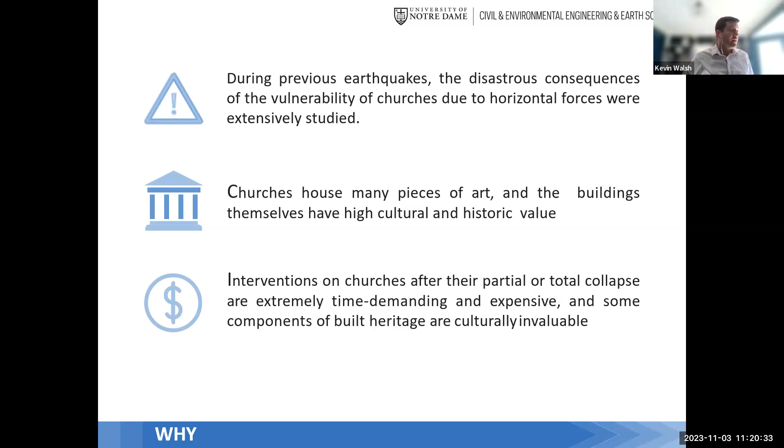Well, there are a whole lot of churches in Italy. We joke that if you spun yourself around three times blindfolded and just stumbled a couple hundred meters, you probably walk into a Catholic church in towns in Italy. So there's a whole lot of churches, and you can't simply say, well, let's go retrofit all of them right now. Which ones do you start with? How do you retrofit them? There's a lot of decisions that have to be made before you just go about doing that, because certain types of seismic retrofit can be very time demanding, expensive, and of course, hurt the fabric of the church itself.

So here's a number of facades as well. You can see that there's quite a bit of variety, even though we're going to talk about how we tried to make our sample population as homogeneous as possible.

So we selected 72 churches across Italy. To the extent of our knowledge, this is the most geographically extensive review of medieval churches in Italy. There have been very good and detailed and precise evaluations of churches in specific regions, typically following earthquakes, but we're not aware of one that went as far north and as far south as Italy. Italy is a very parochial country, and one of my colleagues joked that the only reason I could work in both the north and south was because I wasn't Italian.

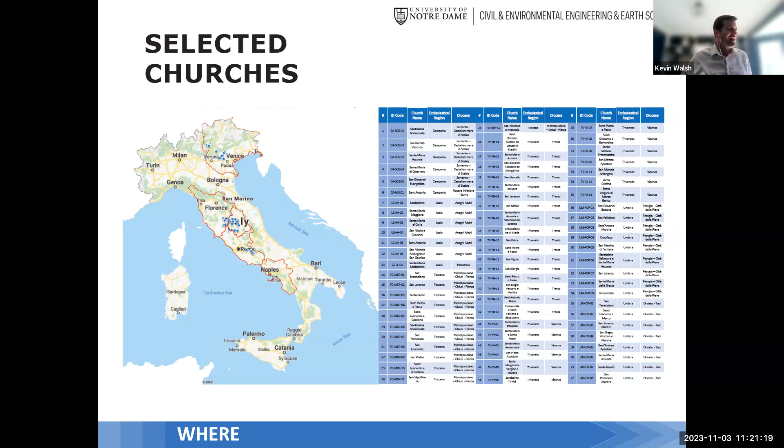So how do we go about selecting churches? There are thousands, tens of thousands of churches in Italy. How do we select the 72 that we ended up working on? Well, there were 4 criteria, and I won't name them off here because we're going to go through it.

So first is architectural and spiritual value. There needs to be some people going into the church, though not necessarily a lot. I want to emphasize we weren't necessarily looking at large churches, like St. Peter's, where much smarter and better resourced people have already put a lot of effort. We're largely focusing on smaller, rural, community churches, ones that maybe have been overlooked by researchers and investors in the past, but we still want to make sure they are being utilized, particularly by members of the community.

Geographic region, we wanted a spread, for a few reasons. We wanted to look at churches with differences in their material makeup, which look quite different in the north versus the south. We also wanted a range of seismicity. While all of Italy is, by US standards, medium to high seismic, there is still a spectrum across the country, and we wanted that diversity as one of the components for our holistic risk assessment.

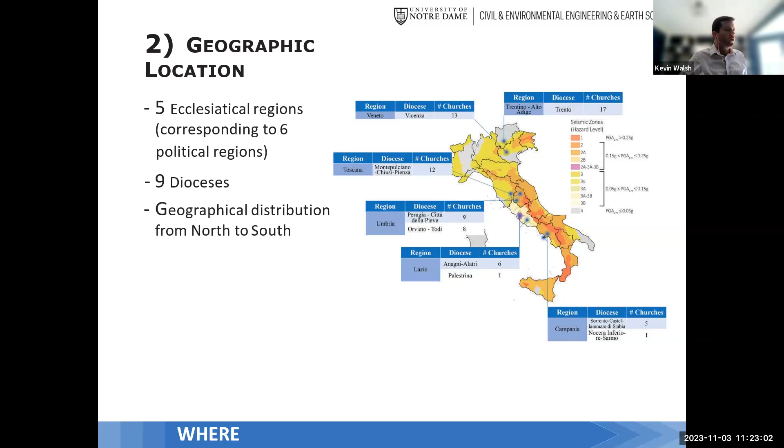Overall, our churches covered 5 ecclesiastical regions, corresponding to 6 political regions and 9 dioceses. We went all the way up in the north in the mountains, down to Naples in the south.

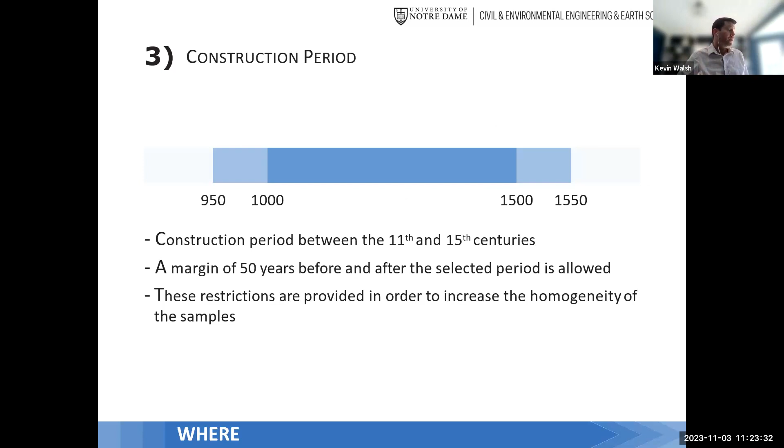Construction period was medieval, largely between the 11th and 15th centuries. We gave ourselves a 50-year buffer on either side, again trying to increase homogeneity. Lots of churches were built after that time period, and even some before it, but we wanted to focus on this era as a popular church-building era for many of these community churches, representing an extremely important heritage value to the people of Italy.

For those who haven't been to Italy, the layout of many old towns—and when I say old, I mean 1,000 years old, not 80 to 100 like in America—is quite different from what we see in North America. A lot of these churches are not separate buildings from everything around them. One of my colleagues took me to his mother's hometown, and it was literally just one building, with tunnels and doorways carved through it, where a whole town of a few hundred people lived in one contiguous structure. That requires a very different structural engineering approach to analyze.

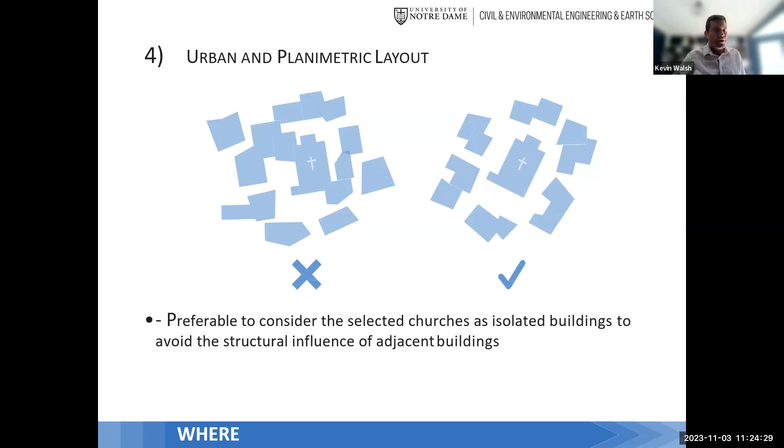So we helped ourselves by looking only at planimetrically isolated churches. The church needs to be standing by itself, not necessarily connected to a large number of other buildings in the community. That way we can carry out the structural vulnerability analysis more readily.

We actually did 3 phases of this work, and I'm going to focus on 2 of them today. First, how do we come up with a provisional seismic risk assessment? The goal is to tell the facility managers of an archdiocese how to prioritize which churches to investigate further—which costs more money, hiring a competent engineer, and potentially retrofitting—so they know where they're most likely to get their proverbial bang for the buck.

If you've read this excellent document from the World Bank, it defines 4 components of risk: hazard, vulnerability, exposure, and consequences. There are different definitions—some people combine 2 of the last 3—but generally speaking, risk is the functional product of these 4 components. We wanted to identify factors related to the churches that would represent these 4 components, and we came up with 13.

Hazard, for example, would include seismicity, where we looked at a number of different average return periods. Vulnerability would involve the material and structural strength, or lack thereof, in different components of the building. Consequences would involve economics and what is lost if the church is damaged, and exposure covers who's using the church, how many people are in it—basically how much life is at stake if the church were to collapse with a congregation inside. So we have 13 different subcomponents that we looked at over the course of the study.

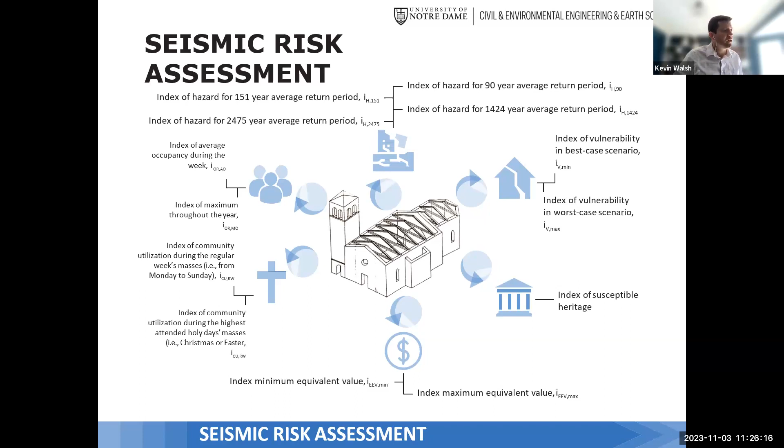I'll start with our index of hazard. Here we looked at the peak ground acceleration, just following the Italian standard for this.

Now, I just told you in the previous slide that we need to combine 13 different disparate pieces of information. They don't follow the same scale, so how do you do that? For every index I'm going to talk about, you have to come up with a statistical distribution so you can renormalize the values, whatever the unit is, into an index between 0 and 1.

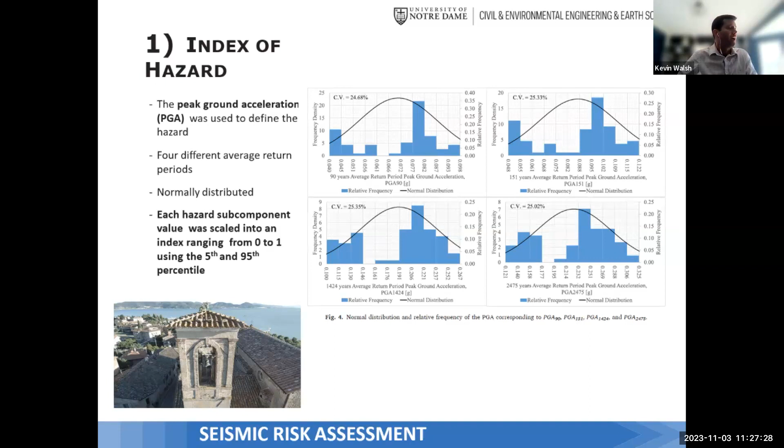We generally use distribution cutoffs of the 5th percentile and 95th percentile in order to do that. I'm not going to repeat this step on every slide because it would become redundant, but we use this approach on all of the indices I'm about to cover here.

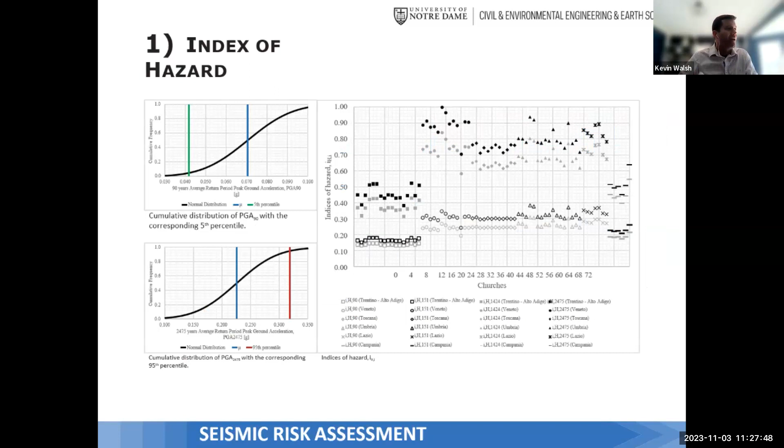For each of our 4 major components of risk, we came up with an index. First is hazard, and you can see that when you take the seismicity of our 4 different return periods across all the churches in our different regions, you get a pretty good spread between about 0.1 and 1 on a normalized unitless index. So the next major component of risk is vulnerability.

We wanted to look at the lack of structural strength in a building. If you think about major earthquake collapses you've seen from videos of Northridge or the 1985 earthquake in Mexico City, you see buildings that get very damaged and then tend to collapse into their footprint. That's your standard moment resisting frame building in a downtown area, say in North America.

But if you're looking at an unreinforced masonry building, particularly one with very tall and slender elements like a church, that's not always how the buildings fail or collapse. They tend to have large components that just fall outward, for example.

So what the Italians have done is identify these as macro blocks. If you look at a church, you basically pretend it's made up of a bunch of loosely fit together pieces, which is largely what it is, big pieces of walls. And how do those elements actually collapse, fracture, crack, or fail in some meaningful way?

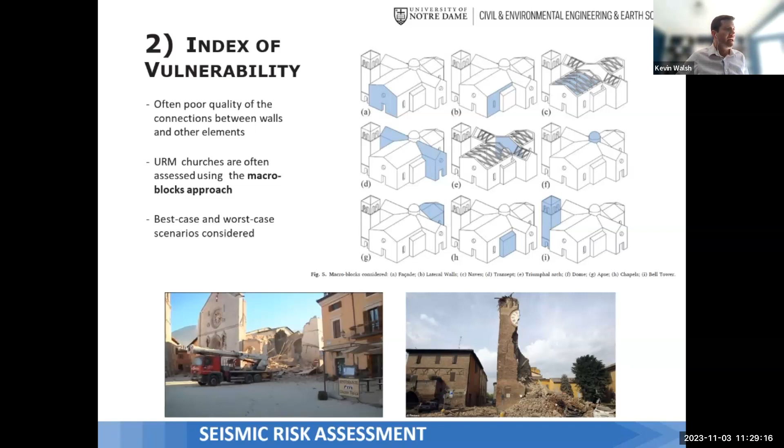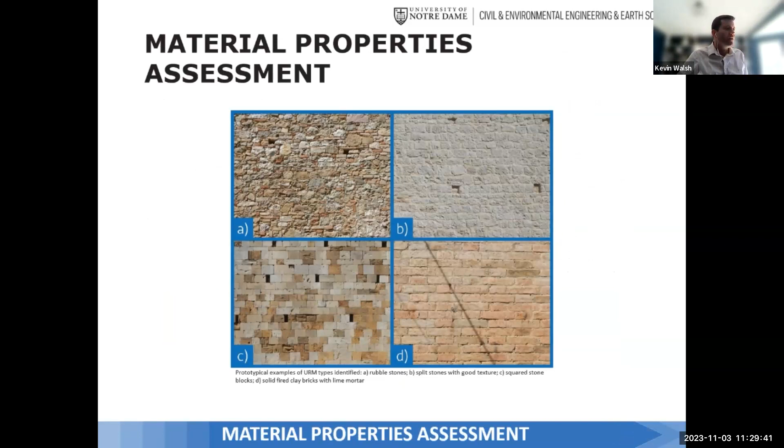I mentioned before that there's a wide range of materials depending on where you are in the country. I'm not going to get too much into our material assessment, there's a whole other paper and presentation on that. But I wanted to give you a sense that we have everything from nicely put together field rubble to almost manufactured-level consistency of rectangular bricks and blocks. So a wide range there.

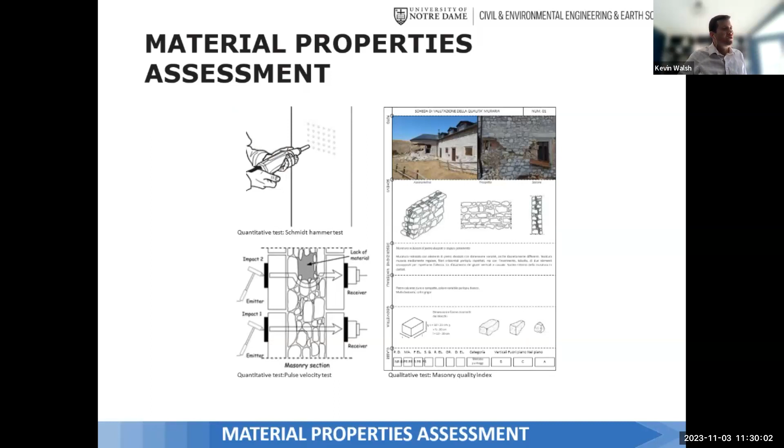And we carried out non-destructive testing. Why did we do this? Well, some of the macro blocks can only be solved if you have a sense of the material properties. We used a Schmidt hammer and a pulse velocity test. Obviously, the owners of these churches didn't want us taking out large chunks of their building and doing destructive lab testing, as informative as that might have been.

And we had a group of undergraduates who helped us. We're a very teaching-focused university at the University of Notre Dame, and we love getting our undergraduate students into the field, particularly if they can go abroad. So David led a troop of undergraduate students in civil engineering to Italy to help carry out these seismic risk assessments, and you can see them lining up the grid and carrying out the non-destructive material testing.

So our next index is exposure. Basically, who uses the church? We looked at a number of different flavors of this, like on average, how many people are in the church. A lot of Catholics nowadays tend to be Christmas and Easter Catholics, so you get very large congregations on major holidays, but not necessarily every single Sunday. So you want to look at both the average and the maximum occupancy here.

The other component we wanted to examine was community utilization. Let's say you have a small community but they actually have multiple churches. People tend to be very devoted to going to one church over another, and that's perfectly fine. But if your concern is, well, if one church collapses but we still have another twice as big as it needs to be for the population, people at least still have a church they can go to on Sundays and holidays, so there's still a church serving its function in the local community. We wanted to look at the community utilization of churches by considering the number of churches and the population of the community.

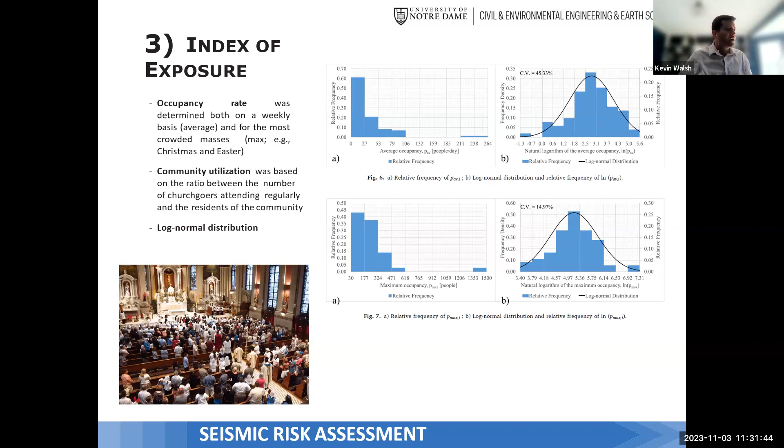You can see that we came up with some log normal distributions there, which are not uncommon at all when you do anything in a sociological sector.

And then finally is the index of consequences. This is where I get really nervous. I'm a structural engineer by trade, I'm a very good structural engineer, but I am not an art historian.

But if you appreciate and value the susceptible heritage inside these churches, you need to account for it in some fashion. So following educated judgment, as well as archives of the diocese and touring guides of Italy - there's a famous guide called the Guida Rossa, I'm pretty sure I butchered that, David's probably giggling at my attempt at speaking Italian - we had a sense of where important art was in churches.

And of course we also visited the churches ourselves. There was one small rural church that had an original Michelangelo statue. Incredible, right? The type of thing you'd typically see in the most famous museums in the world, sitting in a rural church. If that church collapses and nobody's in it, that's great that nobody died, but you're still going to lose an original Michelangelo statue, and you want to account for that in some fashion.

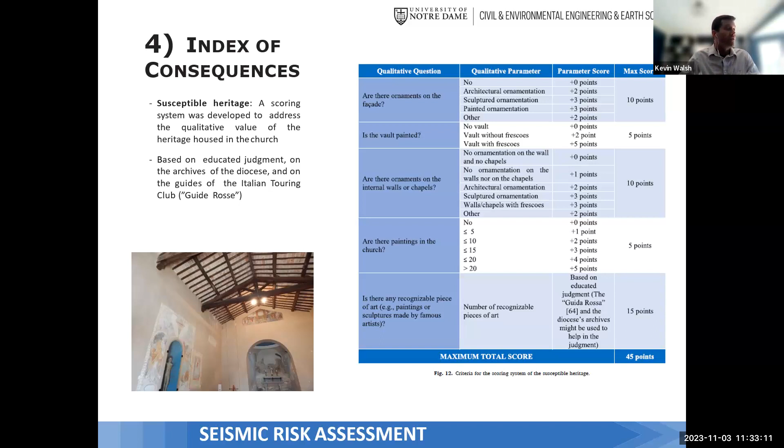So we have a heritage fabric scorecard where we wanted to account for the importance of the art, the frescoes, the statues, and the fabric in these churches. Again, very uncomfortable for me to do. I have every bit of certainty that art historians would criticize the heck out of this approach, but we wanted to make sure it was accounted for. Otherwise we'd have to ignore it, and we didn't feel right about that either.

Here's just some examples of some of the beautiful things we saw in these churches - just incredible craftsmanship that would be very difficult to replicate today. It's not like you could even put a number to a lot of this art and say, well, we'll replace it if it were damaged. It would be very difficult to do so.

But speaking of economics, we did want to know what is the real estate value of this. So we hypothesized that these churches could basically be equated to a 3-story residential building, and we looked at the cost per square meter of reconstruction. It seemed quite reasonable, based on what we procured from local contacts, that you could build a functional - perhaps not quite as beautiful as these medieval churches - but a functional and nice 300-seat church for a couple million euros. We scaled our numbers to that, keeping in mind that just like here in the United States, there's a range of real estate values across Italy. Some places have cheaper real estate than others, and we wanted to account for that equivalent economic value. So you can see, again, a log normal distribution we came up with for the multiple economic criteria.

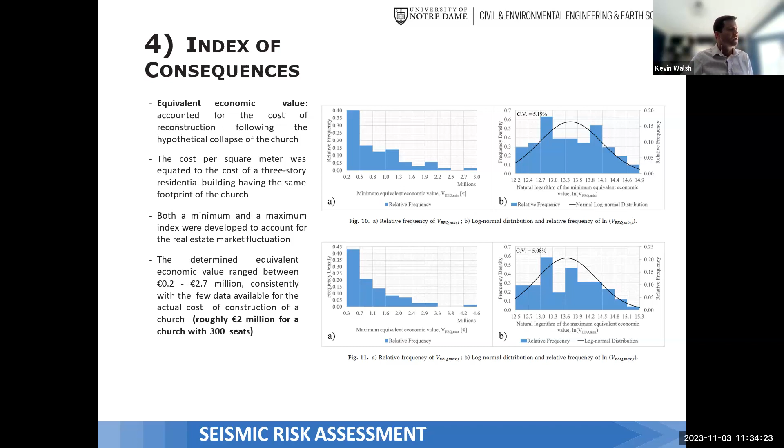So now we have 13 different indices, subcomponents of risk, and how do we combine them all? We're going to use something called fuzzy set theory. I'm not going to pretend to be an expert on fuzzy set theory at all - my colleague David did the deep dive into this, so I'm going to struggle through the next few slides. If anybody has questions about it, we'd be happy to take your more precise questions at the end.

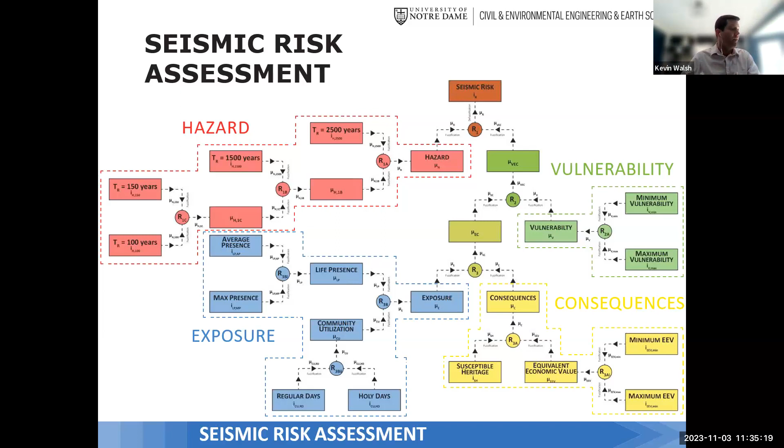But basically, the process is this: we have 13 different subcomponents. You take a pair of subcomponents and find a way to combine them, which gives you a new index. Then you combine that index with another index derived from another pair, and now you're down to even one fewer index. You just keep going through this process until you only have one index at the very end, and that's going to be our complete seismic risk index that captures all these different components and factors related to risks in the church.

And here's how we set up our fuzzy set theory to do it. The great thing about fuzzy set theory is that it not only allows you to combine disparate factors or indices like you've just seen here, but you can also adjust it to account for your level of uncertainty, as well as the lack of complete independency between indices.

I won't get too much into the weeds here, but for every index we have, we lay it down on this template and create a 5-tuple array. For example, if this were our seismic hazard and it was relatively low, we'd have a 5-tuple array with 2 values. Again, we want to account for uncertainty, so we don't want just one value, but a range of values, sort of on the lower end.

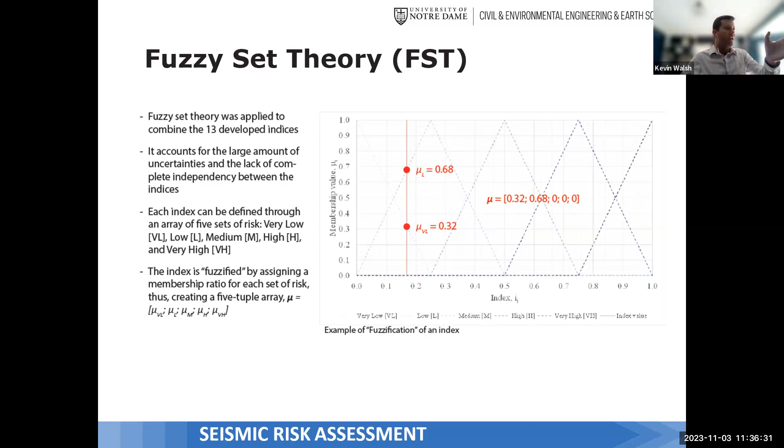And if this were one of our churches that had a very high seismic index, then that red vertical line you'd see there would be on the right side of the sheet, and we'd have values other than zero sort of on the right side of our array.

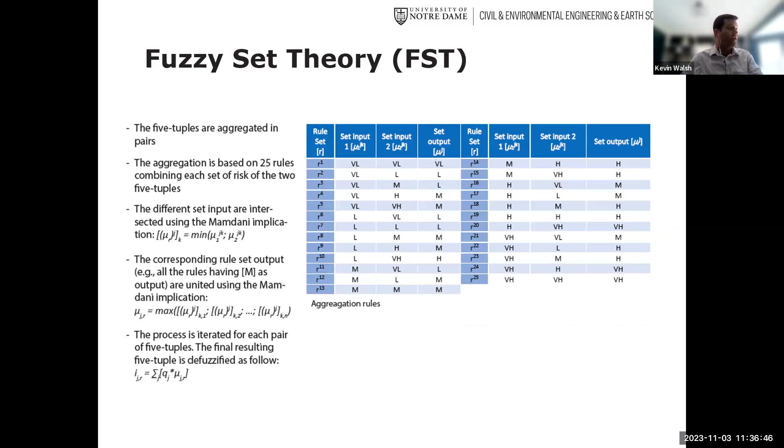Then you have to set up an algorithm for how you combine these - how do you combine values that are very low and very low, or very low and medium? So you basically set up a policy for doing this. And after processing all these values, you end up with a single risk rating.

Now, this could seem a bit strange to a lot of people - how do we combine all of these disparate values with a high level of uncertainty and come up with a single value? Well, you really should pretend that there's whiskers on these, and perhaps very large range whiskers. But the goal here is not necessarily to be precise.

Keep in mind that our goal is to advise the facility managers of these parishes and dioceses, as well as the bishops overseeing all the properties in Italy. How do you pick one church out of a dozen to start with as your highest risk church? The one that we've circled there was the highest risk church in the region of Lazio.

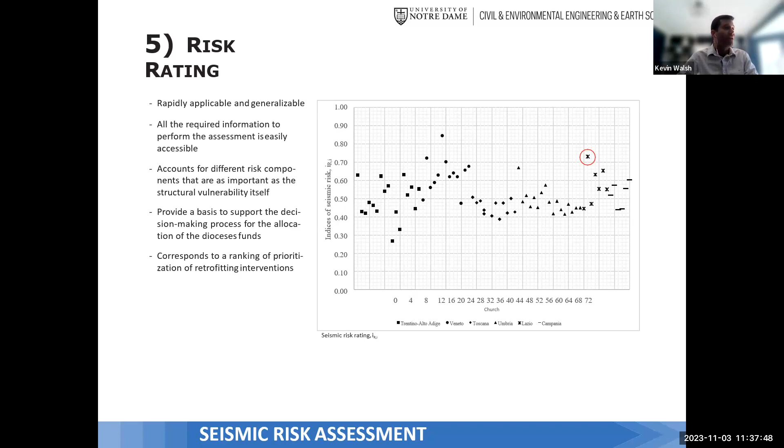What's interesting is that, independently, through their own process that had nothing to do with what we were doing, the diocese there decided that of their several churches, that was the church that posed the highest overall risk to them as well. So independently, we were able to validate this process, at least for one case study.

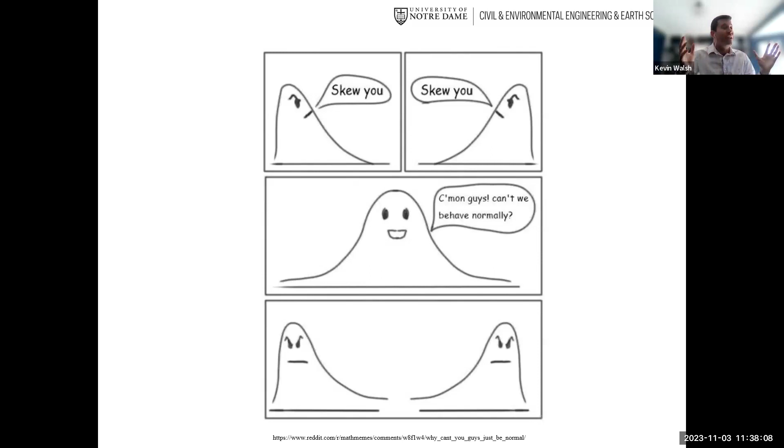By the way, whenever I talk about statistics in class, I always find some meme just to get students to laugh a little bit, because otherwise statistics can be quite dry. So I'll let you read this. I'll just presume that there is infinite laughter on the other side of this muted Zoom call.

Okay, so now that we have picked one church in the region of Lazio to focus on, what do we do next? Here's that church, the one I circled in red before, and again, independently, the diocese decided this was the church they wanted to focus on as well. This is the Church of Santa Maria Maggiore, and last we spoke to them, they were currently designing it for a retrofit.

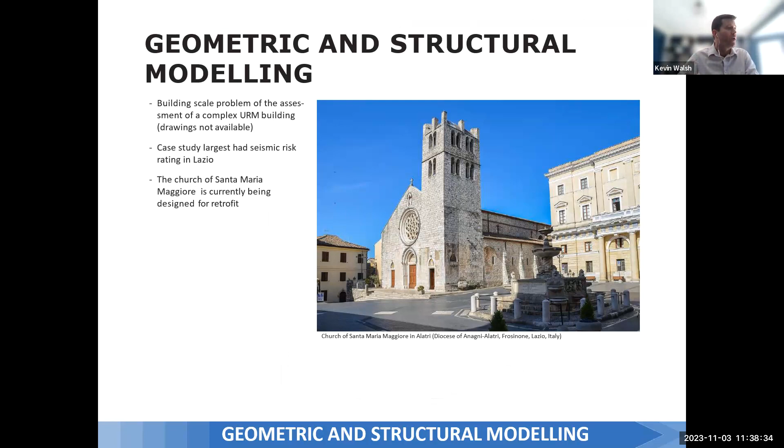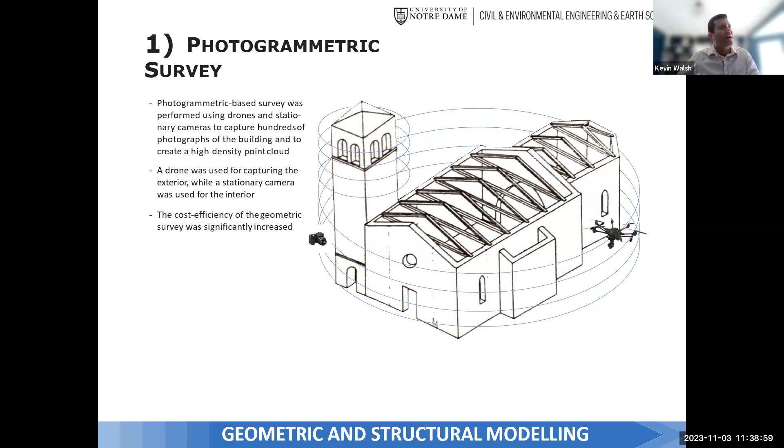At this church and several others, we took drones and pairs of cameras out, and we took full photogrammetric surveys. We took enough high density photographs overlaid with one another that we were able to come up with high density point clouds, and we were able to do an average church - keep in mind these are 300-person churches, not the size of a St. Peter's - in about half a day, say 3 or 4 hours or so.

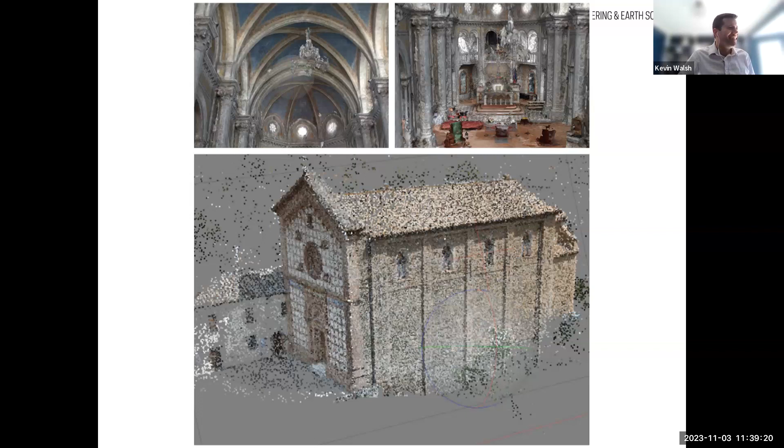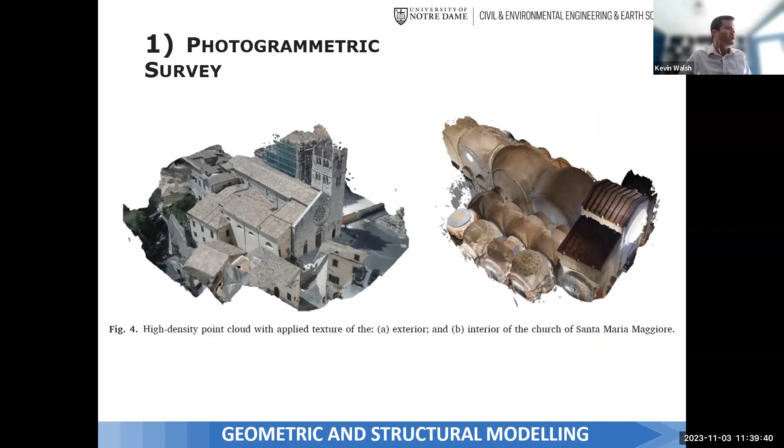So we've got a full surface model of both the exterior and interior of the church now, and we had some fun with it too - we did some flyovers.

I was afraid to run a video on today's Zoom call, but here's our students up in a tower of one of the churches with some mountains in the background. So it's pretty cool having a drone out there with you in Italy.

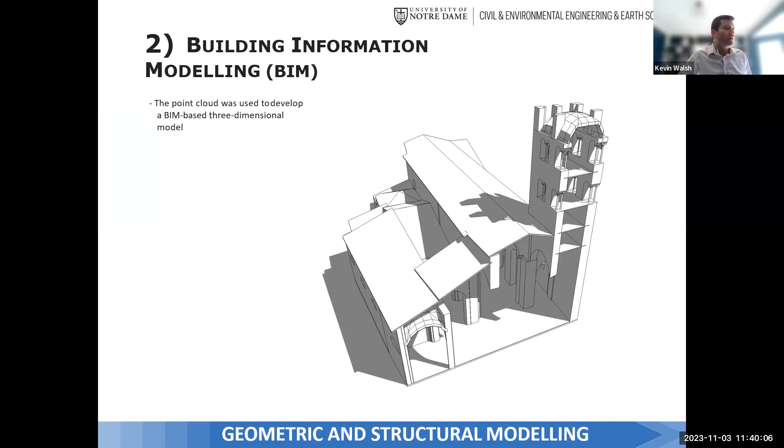Once we had this point cloud, we were able to put this into a BIM-based three-dimensional model, such as Revit. The beauty of having it in a software like that is you can cut it however you want and look at any part of it.

Perhaps the biggest benefit of having it in a comprehensive BIM platform is, what do you do with all this information? We've captured all these risk components of the churches, taken pictures, found very few documents. None of these medieval churches have documents, but maybe there's something relevant to the church we have here. We have non-destructive testing material data from our Schmidt hammer test and our pulse velocity. Where do we put all of this?

A common trend in the construction industry here in the US for higher end buildings, and it should be everywhere in my opinion, is to make sure we're capturing all this facilities asset management data in one place so we can use it for the future. Why am I going to need my materials strength values tomorrow? I probably won't, but there's a darn good reason why I might need them 20 years from now. So you've got to put all this information in one place.

I'm really excited about the trend we've been hearing is coming for 20, 30 years, but we're finally starting to see it in the AEC industry, about putting all this information in BIM, not just for initial construction, but for long-term facilities asset management. That's what we were able to provide to several of the dioceses, BIM files with all this information stored in one place.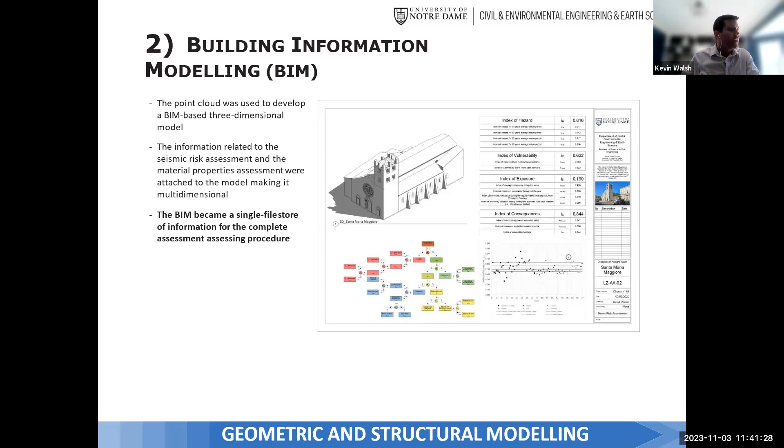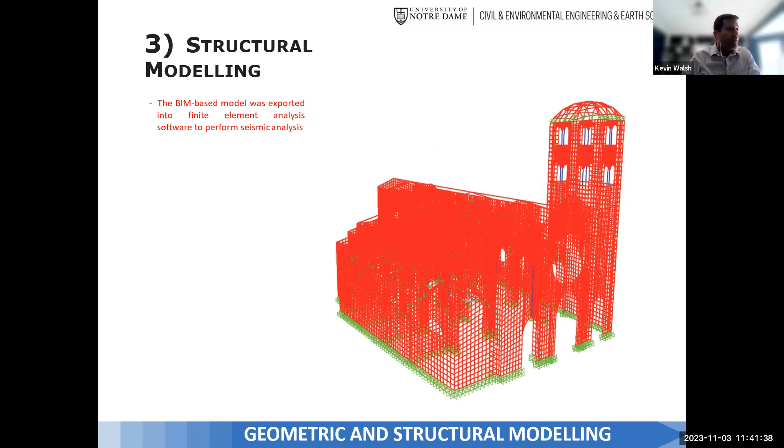So now that we have it in a BIM platform like Revit, you can export it into a structural analysis software. We use SAP 2000. The first thing we did was carry out a modal analysis just to understand the dynamic behavior.

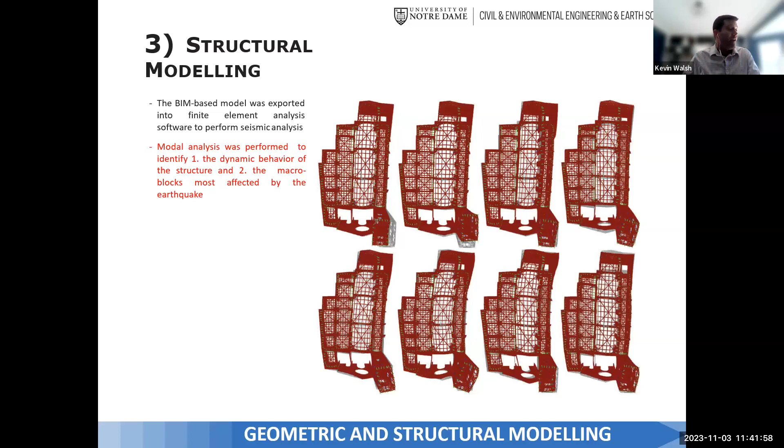Primarily, we wanted to identify which macro blocks, if you think back to that earlier slide, are most likely to be affected. It's probably not shocking to most of you that if you have a very tall, slender bell tower, that's a very vulnerable macro block to dynamic shaking.

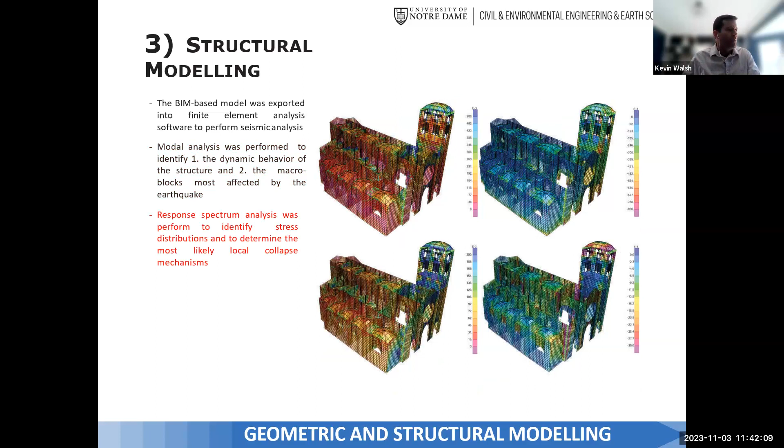We also carried out a response spectrum analysis to identify where the highest stress distributions were in any given building. Then we used all this information to make our best judgment as to where the local failure, collapse, cracking or fracture mechanisms would be. There's a number of generally simple hand calcs you can carry out to identify that.

Here you see the keystone in a rose window that we identified on this particular church as a potentially very vulnerable element, because it's sort of a tall, slender parapet there and there's not a lot bracing it. So we can carry out a hand calculation to determine what is the likelihood that this is going to collapse in a given return period earthquake. And if it's likely, then that's the element they should retrofit with a prioritization.

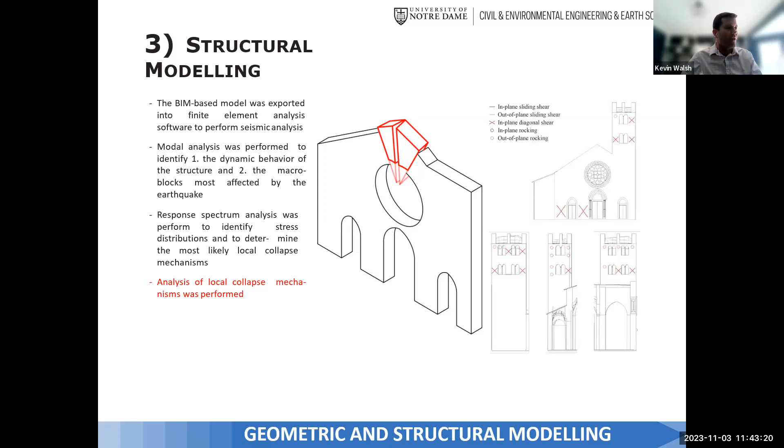So what we've done here is started very macro scale and worked ourselves down to very micro scale. We've identified the church in a given region that poses the largest overall risk, and we want to break that down too, in case the diocese has questions, like why is it the overall risk? There's a lot of nuanced questions to be asked and answered there. But we've gone all the way down to, if you only have a very limited amount of money to spend on this church, here's the thing you should probably retrofit as a priority.

Just wanted to acknowledge David again, who did a ton of hard work on this, and really not only created a great thing for himself and communities in Italy, but also launched a very exciting career for a number of the students who went with him, who went on to graduate school to do research themselves and pursue wonderful careers in our industry. So thank you to David for that.